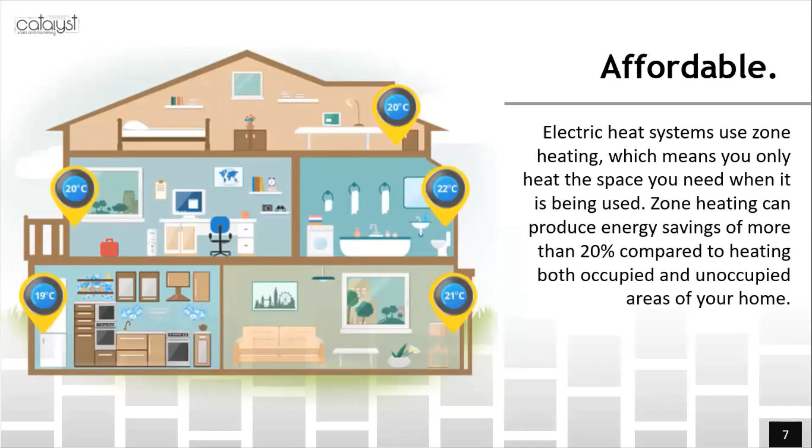Clean, safe, and carbon-free. So they produce zero combustion in homes, so they're completely safe. This means no carbon monoxide odors, fumes, smoke, or exhaust. And depending on the type of electric heating system, there'd be no noise.

Flexible and reliable. Electric resistance heating systems can be configured with programmable, non-programmable. Programmability has really come a long way now, where you can actually go on your phone and you can turn your heaters on from a distance or modify their settings. You've also got the adaptability platforms, where a device may monitor how you move through your home, also saving.

And then you also have your setbacks, delays, setbacks overnight, or setback while you're away. And setback, for instance, has been proven to save up to 6% just by setback. Also, the systems are reliable. I know personally some systems that are well over 30 years old that are electric resistance heaters.

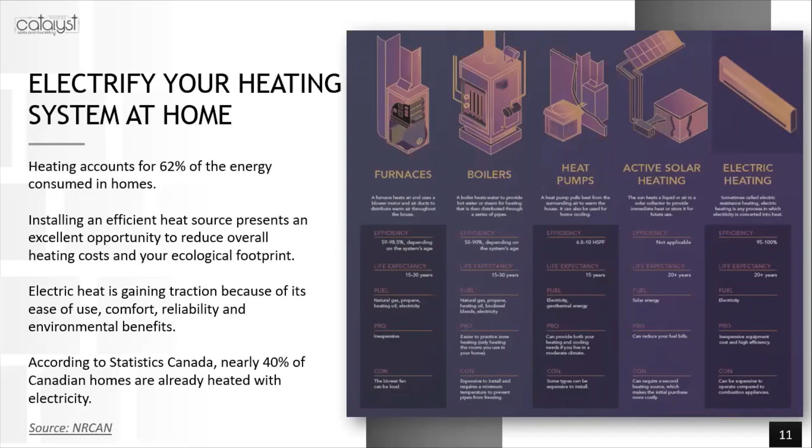So why choose electric heat? Well, it's affordable. One of the most common misconceptions about electric heat is that these systems are costly, when really, over time, if you look at the maintenance costs, there's not many moving pieces. They can typically be less expensive than other heating sources. One of the least expensive, we all know, would be electric baseboard. I can't really think of any others that would be less expensive than that.

Here we see forced air systems, radiant heating, hot water baseboards, so that would be through an electric boiler. While it's true that operating costs can vary with provincial electricity costs, the actual cost to operate an electric heat source is lower because it has fewer moving parts, as we stated. The other thing you can do is zone heat. Zone heat's one of the easiest ways to get ahead.

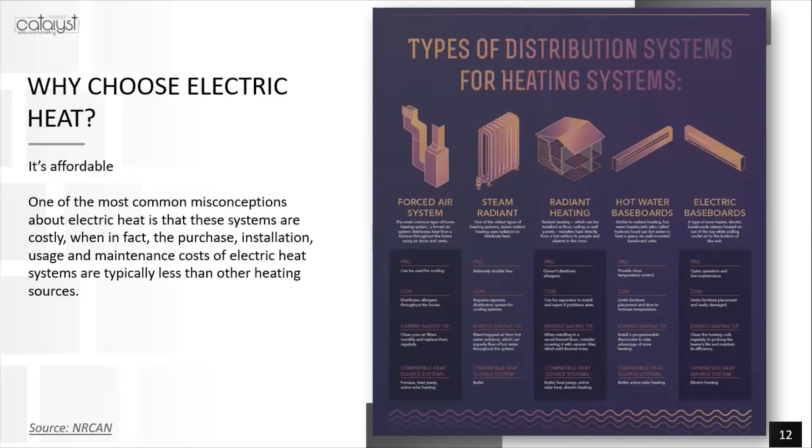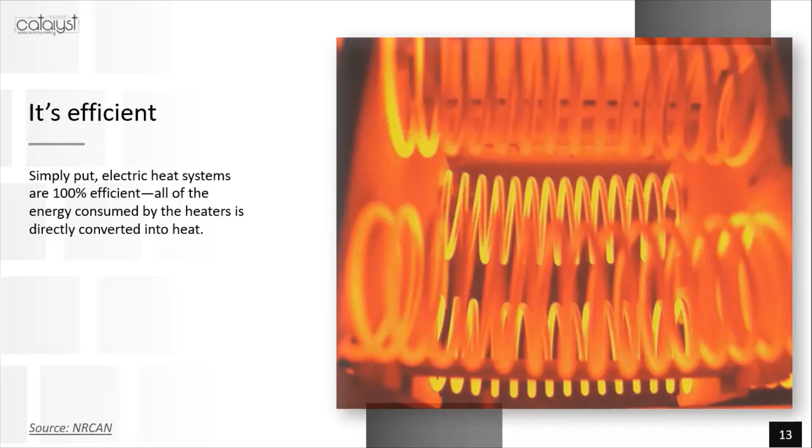They're efficient. Again, 100% of any energy that comes into the home through the form of a resistance heater comes into the home. It's 100% efficient, meaning the dollar you spend is the dollar coming in. It's flexible.

Electric resistance heat systems are more sophisticated than ever before. They can be configured with non-programmable, programmable, and smart connected thermostats. I think you can do some things now even with Alexa and Google Home. There's different types of thermostats out there. They offer increasing levels of control in every room.

Some homeowners, if they've already got a central heating system, a popular thing to do is to supplement areas that you're in most often. So if you've got a central heating system, you maybe only have one or two thermostats. That makes it a lot less efficient, so someone may install a heater in places they're in most often, like a living room or a kitchen.

This is typically done during the winter months, and that has shown to increase comfort and lower your overall heating bill. This still gives you the flexibility to cool with central air if that's what you have. It's clean and safe. If you've got a fuel burning system, you're likely to be familiar with odors. Electric heating systems don't have any combustion, so there's no odors or harmful gases.

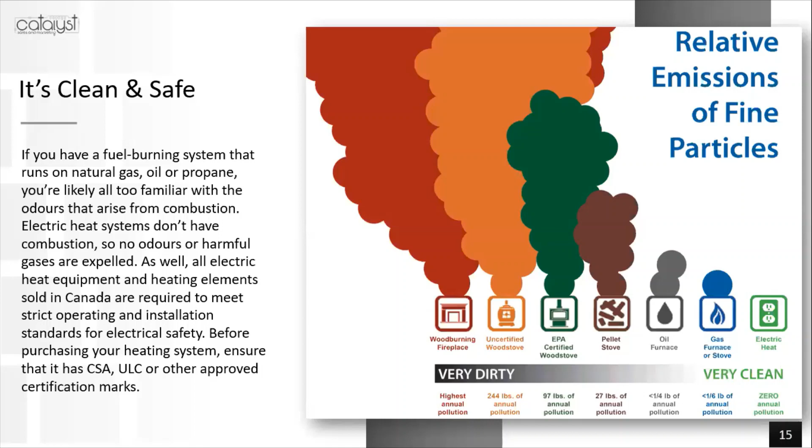A line could be punctured. I've heard about lines freezing and bursting. They can also have a slow drip, which can contaminate your property and is obviously not good for the environment. As Atlantic Canadians, we all know or may have heard of somebody that had a barrel leak or rupture and it became a catastrophe. That's only the people that said something about it. There's countless others that may not be so forthcoming in an incident like that.

Reliability. Again, electric heat is indeed reliable. In the event where you've got a central system, if there's an issue with it, the central system would often have to be taken offline. Whereas with electric heat, it's usually spot heating. You've got several heaters all over the place, and if one has a failure and can be removed, it's a small bump.

Whereas with a typical large heating system, if there's an issue with it, it may have to be taken offline. There could be more complications. Again, we know there are electric heaters out there that have well surpassed the 25-year mark.

Now, here's a slide we use often in our presentation for solar. What this is showing is the tons. We see here in Atlantic Canada we have a lot of dirty producing facilities. What you're seeing here isn't power generation. Just to be clear, this is just dirty producers in general.

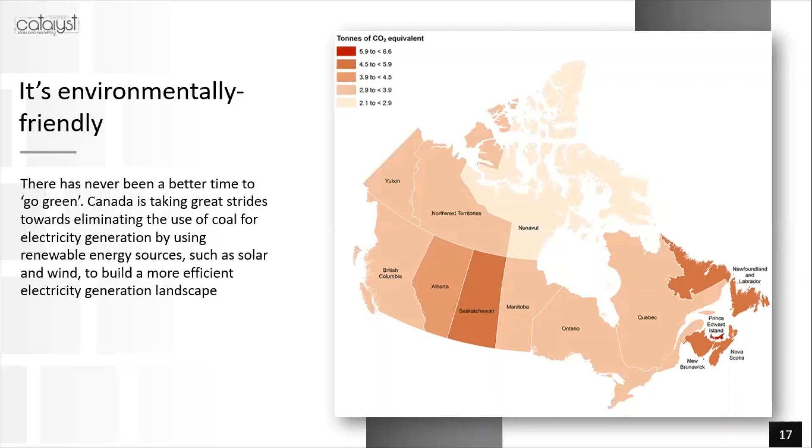Electric heat offers advanced design options. So there's some manufacturers out there that, let's say, if you are going with a heater that you're going to see, as opposed to something that you can't see, like radiant underfloor heating, will actually paint. They'll paint the baseboard, they'll paint the convector. You can get the convector in different colors.

The other thing, you can move things around. You've got areas you can do placement, right? So basically, you can design what better suits your needs. Not every heater needs to go under a window, that type of thing, right? So with all the upgrades you might do to a living space, why not make your heat source warm and inviting?

Another thing we see often, from this perspective of design options, would be radiant flooring. If it's in the floor, then you don't need to worry about what wall you're going to put a device on.

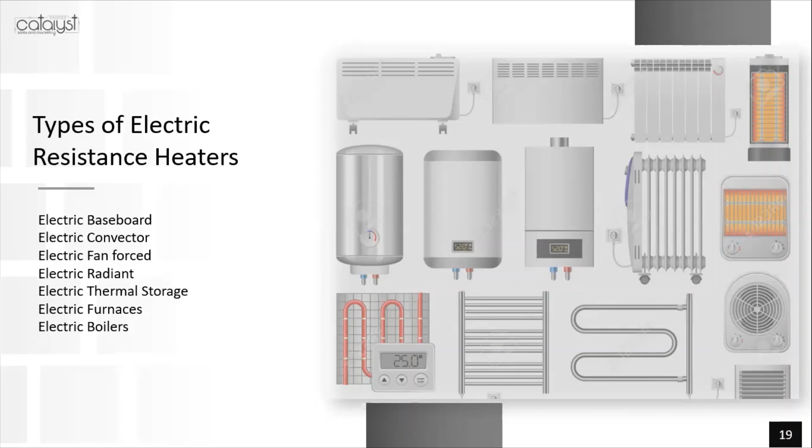And we can't forget these other types of electric heaters, the refrigeration cycle type. These include heat pumps, which are very popular right now. Mini split. I actually have a mini split. I have an open concept home. I have convectors all throughout my home with a mini split. There's also heat pumps, ducted, open loop, and then geothermal.

The biggest difference between these would be that the water-driven and geothermal both get their heat from the ground. Air source is pulling the heat from the existing air. There's some pros and cons. For the water style heat pump and geothermal, the return on investment is carried over time. So there's more invested cost up front.

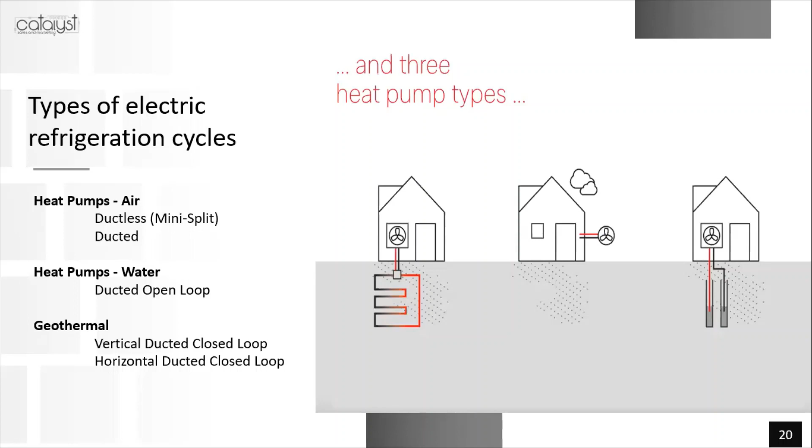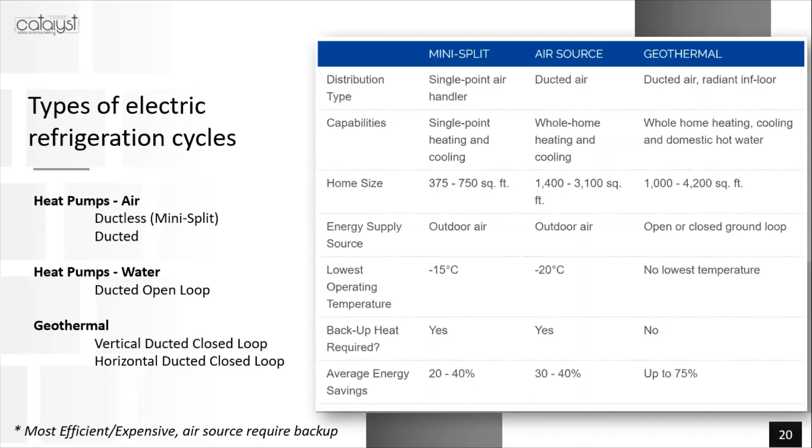So here's some frequently asked questions that we see. Is my living workspace ideal for an electric heating system? Well, any electric heat system can be used in any room or environment. However, these systems work best in spaces that require direct and/or supplemental heating, such as bedrooms, living rooms, basements, new room additions. For instance, in-floor heat systems are ideal for bathrooms. Electric baseboards or convectors are more commonly used in bedrooms and living rooms.

One thing I will mention: before having a heating system sized or investigating, the customer or you should consider properly insulating and draft proofing the rooms, and that'll depend on the age of the home. But a thorough check of all the caulking, weather stripping, and insulation will ensure extra comfort and cost savings for years to come.

Another question: what cost savings can I expect with an electric heating system? Well, zone heating can provide up to, and in some cases above, 20% in energy savings when compared to heating with a central unit. Cost savings could vary from province to province depending on variances in electrical cost. Some utilities also offer special incentives. I believe most utilities right now offer an incentive for ductless mini splits.